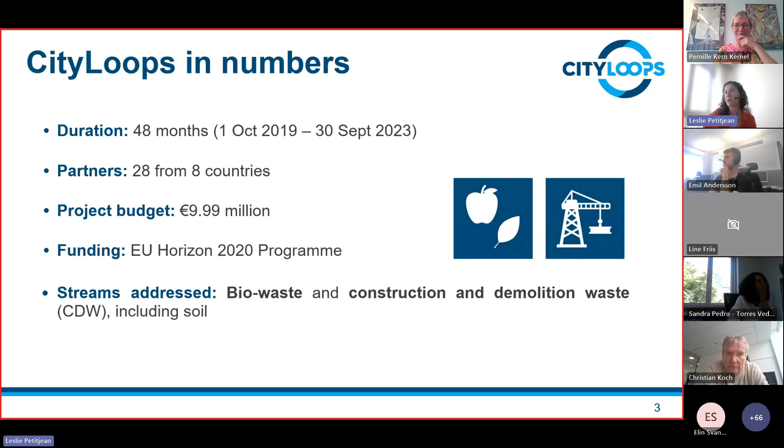About the consortium, there are around 28 partners in the project from 8 countries. Not only cities, but also supported by universities or ministries. That's what makes the big value of this project: the different range of partners working all together on this. This is a Horizon 2020 program.

So the main objective is actually to close, or at least narrow, the loop for those two streams of materials: bio-waste and construction and demolition waste. For this, we have implemented new instruments, new tools, new methodologies in 7 cities. Well, actually it was 7 cities for the whole project, but for construction and demolition waste, it was only 6 cities, which I will present in the slide after this one.

So the goal is to reduce resource consumption and consider how we can work more locally with the resources around the city, avoiding using resources coming from far away, and also reducing the environmental impact, or saving more CO2, for the urban development of the cities.

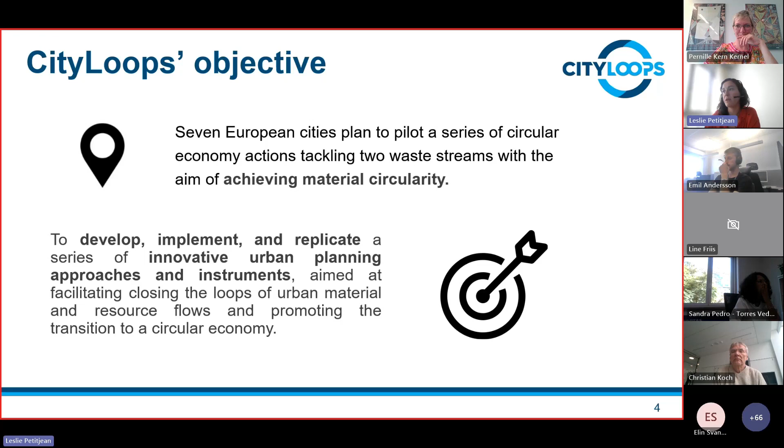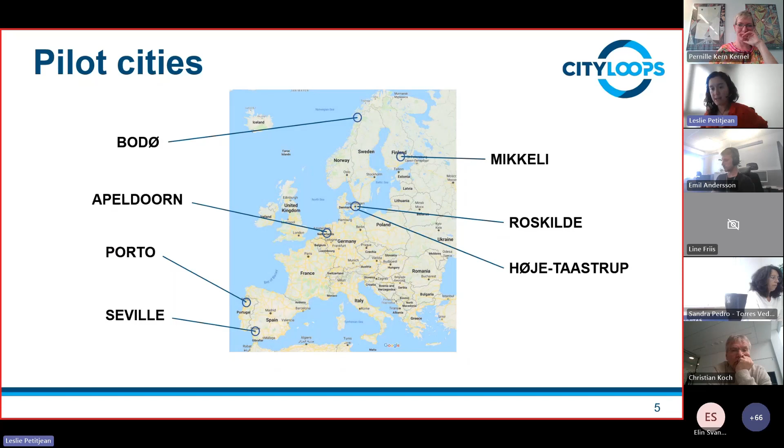So these are the 7 pilot cities which have been part of the CityLoops project. The good thing is it was quite a good representation of the European context, because you can see there are cities from Northern and Southern Europe: Bodø in Norway, Mikkeli in Finland, Roskilde and Høje-Taastrup in Denmark, Apeldoorn in the Netherlands, Seville in Spain, and Porto in Portugal. Porto was not actually experimenting on construction and demolition waste, but the 6 other cities were the partners for the construction and demolition waste.

So this is kind of the case for Mikkeli, for instance, and also Bodø, because I will explain it later, but it was a really huge project. And as you may know, sometimes the timeline of a project, especially for urban planning, gets delayed. That's what happened, but still they have developed many tools and interesting approaches.

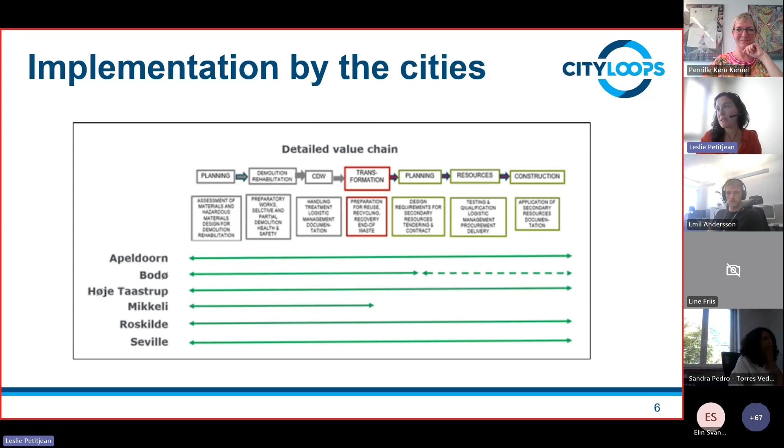So to start, we can start with Apeldoorn, a city in the Netherlands. What was also interesting, maybe I forgot in the last slide, is that these cities are working on different infrastructure, not only buildings. So you have some examples, obviously on buildings, but also on the renovation of roads or infrastructure for public works. This is the case for Seville, for instance.

For Apeldoorn, the project focused on the renovation of a residential road. The goal was to reuse as much material as possible locally. For this, Apeldoorn worked closely with Saxion University. They developed a series of tools and new approaches, for instance scanning the materials to assess the quantity and quality of the pavers that could possibly be reused locally.

What was also really important for the city was to involve the citizens in this project. So they developed raising awareness campaigns to let them know about what would be done within the city and the neighborhood.

When we talk about circular construction, usually we face the problem of storage and matching. Apeldoorn also faced this issue, so they developed a collaboration with an online marketplace. They struggled a bit at the beginning because they wanted to develop their own platform, but recognized it was hard to recruit new visitors. So one lesson learned is that if an instrument already exists at the regional or national level, just work with them because they already exist.

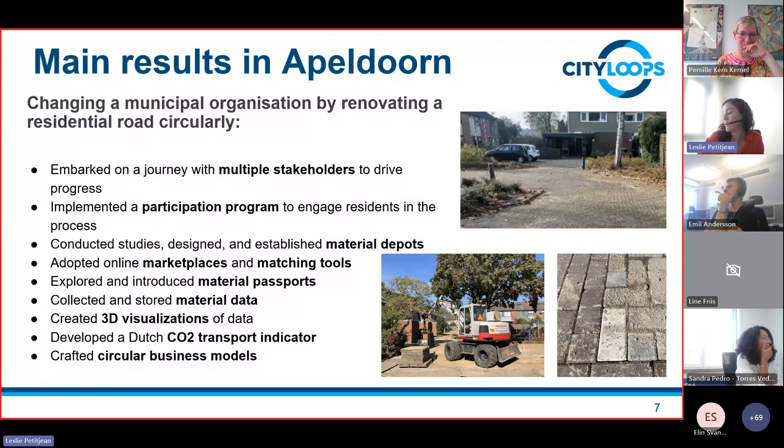So yeah, it was mainly for Apeldoorn, but just to let you know, for all the cities, if you want to know more — I don't have that much time so we cannot dig into each city — there are demonstration reports for each city on the website. So if you are interested in a specific case, just go to the website and find the demonstration report for each city.

For Mikkeli, Finland, they focused mostly on the demolition part. The demo action was about how to demolish more selectively and effectively, in this case a hospital. What they learned is that we definitely need a really good pre-demolition audit to be aware of which resources and materials will be demolished, and which ones can possibly be reused or recycled in another construction.

What was also important, and a kind of legacy for them, is that CityLoops really helped them involve different stakeholders, both within the local authority across different departments, but also externally. For companies, for instance, it was a really good opportunity to develop collaborative workshops, just to make them more aware of the need to develop new practices for circularity.

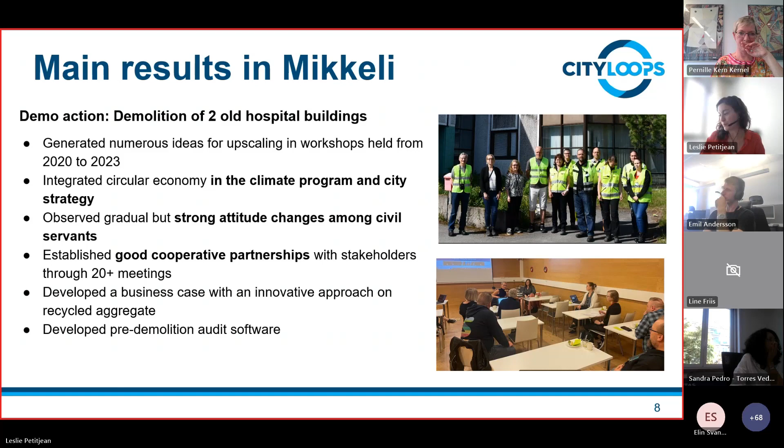For Høje-Taastrup — now we are traveling to Denmark, covering Høje-Taastrup and Roskilde — what is interesting is that they played the role of matchmaker. They went beyond their own assets and buildings, and worked with a social housing company in the city to use concrete that had been demolished from a social housing building to recycle it in the foundation of the new city hall. This is a good example of matching, and shows how the city can play this role of matchmaking between different stakeholders at the local scale.

They also worked on how to reuse soil locally. This is something that has been developed within CityLoops — how we can reuse soil locally — and it has been done by Høje-Taastrup, Roskilde, and Bodø as well.

One of the major lessons learned is what has been done with the old city hall of Høje-Taastrup. They worked with a private developer, Ikano, and embedded some circular criteria within the tender, because the goal was firstly to demolish the old city hall. But after a while, for different reasons, including the price of materials increasing this last year, policymakers and political representatives decided not to demolish the old city hall, but to refurbish it into new apartments in the future urban area.

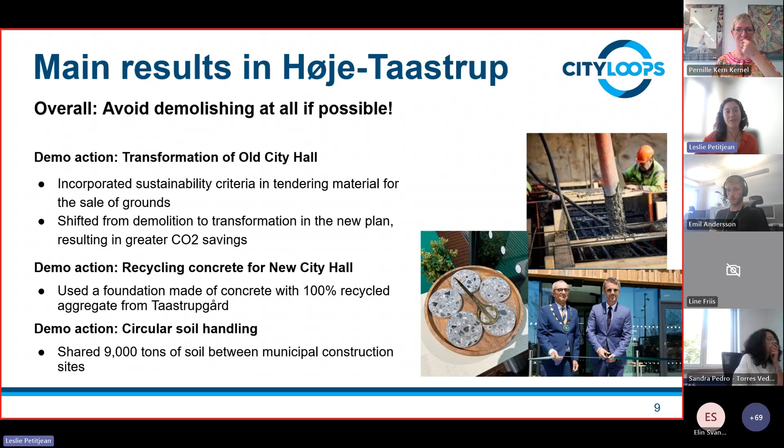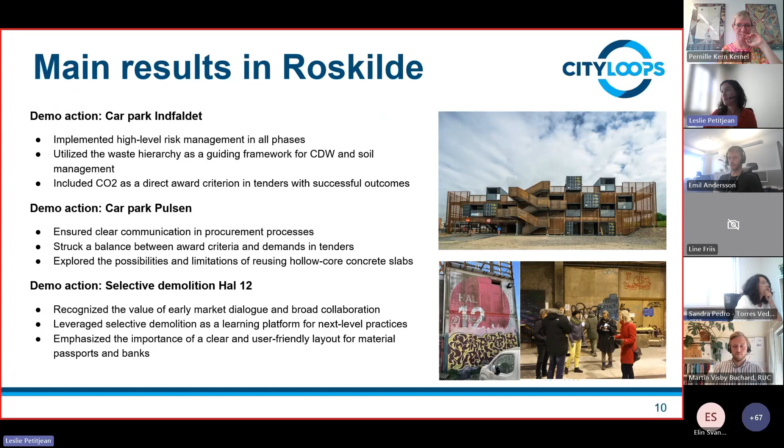From Roskilde, all the demo action focused on the urban area called Musicon, where there was a lot of demolition and transformation of buildings. It was a good opportunity to develop circular practices, especially on how to procure differently, how to integrate circular criteria to recruit the contractor, and how to deal with risk management, defining the risk between the contractor and the procurer, the local authorities, to change practice by managing the risk for this kind of new innovative practice most efficiently.

In Bodø, the main action was to demolish the military airport and relocate it to another area in the city. As I said in the introduction, this has not been done because the action was really too long. But they have developed a really nice digital twin tool, which was efficient to help policymakers take decisions.

This is a tool where you can find more information on the website.

An important thing as well is that they really put a lot of effort into involving different stakeholders - citizens, students, and companies - developing collaborative workshops. I insist on this because stakeholder engagement is crucial to get a lot of people on board with local authority. If you want to work on this, you really need to identify the stakeholders with whom you can work and who are willing to change their practice with you.

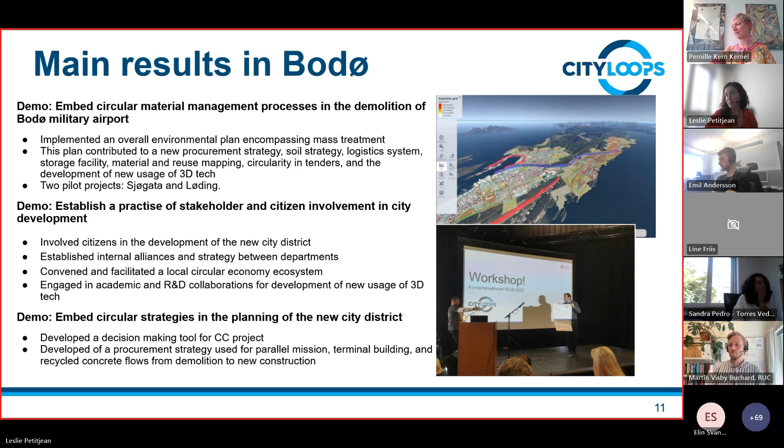To finish with the cities, the last one is Seville, where they worked on water pipelines because they wanted to replace them. The goal was not to use new material for this, but to try the best to reuse the material that they excavated.

One of the big problems in Seville is the illegal dumping of construction and demolition waste in the city. For this, they developed clean points to decrease the rate of illegal dumping, and we have seen that this really helped clean up the city, with people bringing their construction and demolition waste to these clean points.

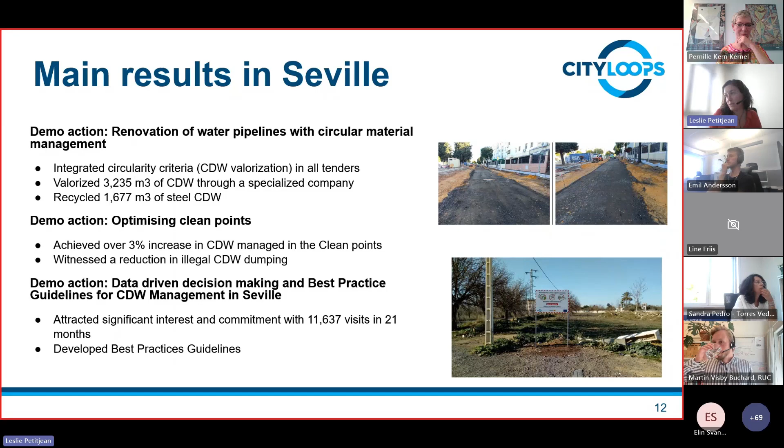So this was quite successful. Just to draw a bigger picture on the different lessons learned, here's a rough scheme. It's always hard to represent, since we don't know if it has to be round or linear, and you can address different parts of the value chain. You don't have to address everything, but we want to stress the main lesson learned for each step.

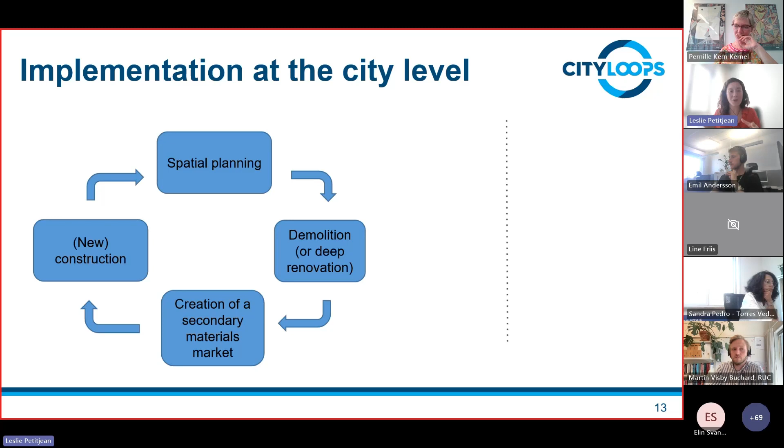So spatial planning, this is also one important lesson learned: the earlier the better. If you want to start working on this, do it well in advance and identify the stakeholders you'd like to work with, because you will never do it too early. This is still innovative, so you need a lot of time to prepare your project and coordinate with the different stakeholders. That's why we really want to insist that spatial planning, or planning in general, is always a really important step.

To illustrate this, we can talk about Bodø, which has done this with their digital twin tool, because data management and gathering all the data on the circular material flow could be really helpful to convince policymakers as well, if you want to launch a circular project.

For demolition, well, one of the main lessons I already mentioned is: if you can avoid demolishing, please avoid it and refurbish as much as possible. This is one of the main lessons learned from Høje-Taastrup. But also for demolition, if we really want this circular flow to be established, we really need to push the supply of reused and recycled materials.

So to do this, we actually have to conduct pre-demolition audits for each demolition or renovation, whatever it may be. This is a picture from Mikkeli, because they have really worked on this and developed guidelines about how to conduct a pre-demolition audit and a good screening demolition. This is really important, because if you don't do this step, you won't have the knowledge of which material you can reuse, within your own construction project, but also for other ones. This is a starting point, I would say, if you want to start this journey.

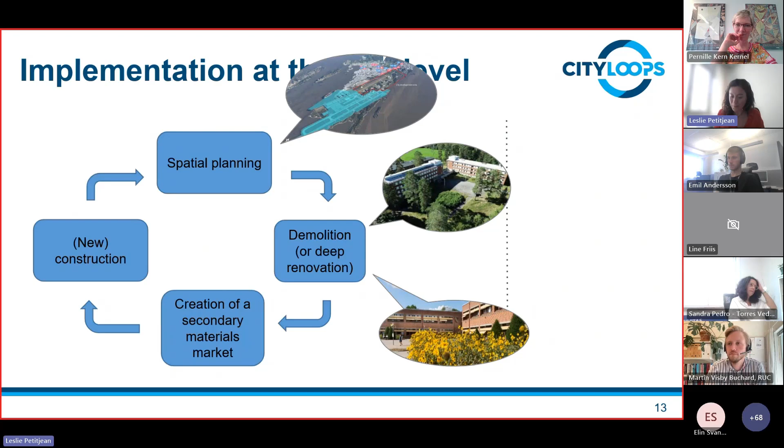Cities have developed material depots locally. They have also developed or used online platforms to help the matching. An example you can find on the Cityloops website is the experience from Apeldoorn, which used the DuSpot platform. But depending on your country, your city, and your local context, you can look for already existing instruments.

And the last point is new construction. We put 'new' in brackets because, again, if you can refurbish, refurbish. But in new construction, the goal is to push the demand for reused material, because if we conduct pre-demolition audits, we will have reused material that we can reuse.

But if there is no demand on this, there won't be a match between the two. So as a procurer, we need to have impact on the demolition, but also on the construction. We need to ask for reuse or recycling material within our new construction.

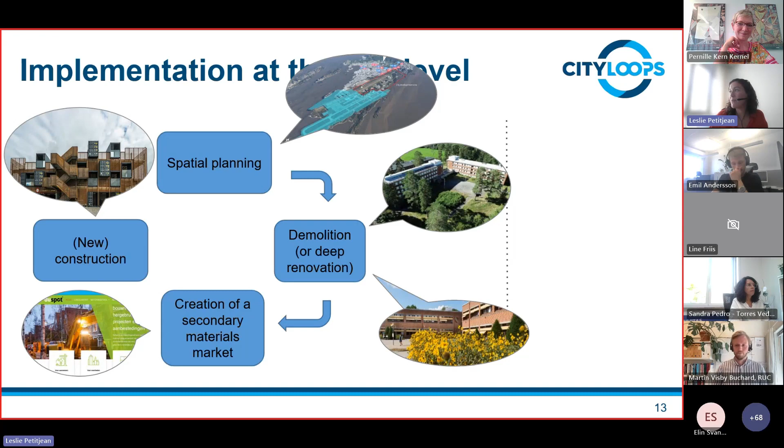This is actually what has been done in Roskilde, in the new parking garage built on the Musicon area. So this is basically the value chain, but here you have also some cross-cutting topics which are really important, like data management and traceability.

If you have developed some indicators about the environmental impact of your project, you can track the progress of your projects thanks to collecting data.

Stakeholder engagement and public procurement are also really important, because you need to identify as early as possible the good stakeholders and contractors you would be willing to work with. And also something we will discuss just after, the change in the organization, because we have seen that this is really a cross-cutting topic.

It will change your organization within the local authority. Some cities have developed internal working groups that worked pretty well, for the practitioner but also for the politician. But organization goes beyond the city, so it has to involve and embark stakeholders outside the city.

This is really a crucial issue, and all the cities say if you don't have political support, and if you don't have support from the different departments, you cannot really achieve this successfully. So you really need to get a lot of stakeholders on board.

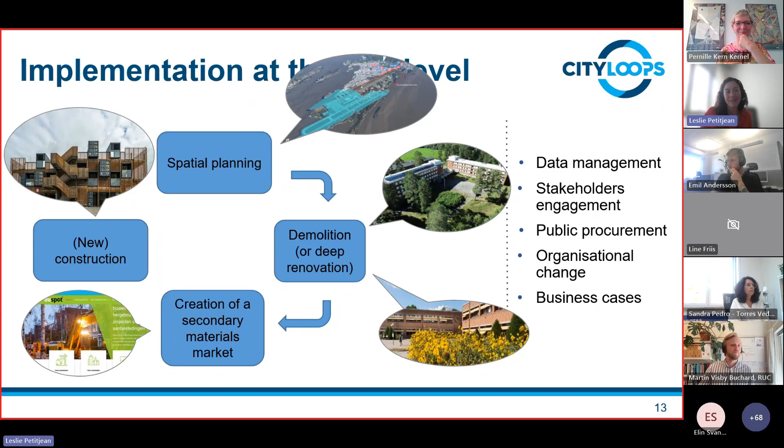The good thing is we have some profitable business cases that have happened in Cityloops. This is good news, because we know this is the major issue we face about circularity - that the market is not always ready. But for some streams and some countries, we're already there. So this is good news.

Just really shortly. We need to wrap it up, Leslie.

Yeah, so really shortly, the role of local authority - if you are a public procurer, we can work on our own assets. But if we want to increase the impact, you can also work as a local facilitator and network developer by developing tools to help matchmaking, and also developing new regulation on your urban planning documents, which can really help increase the impact.

And just two words on the Cityloops handbook - we have gathered all the different experience in this handbook that is available on the website. What we want to give here is a comprehensive overview and the first level of information for cities who want to start working on circular construction.

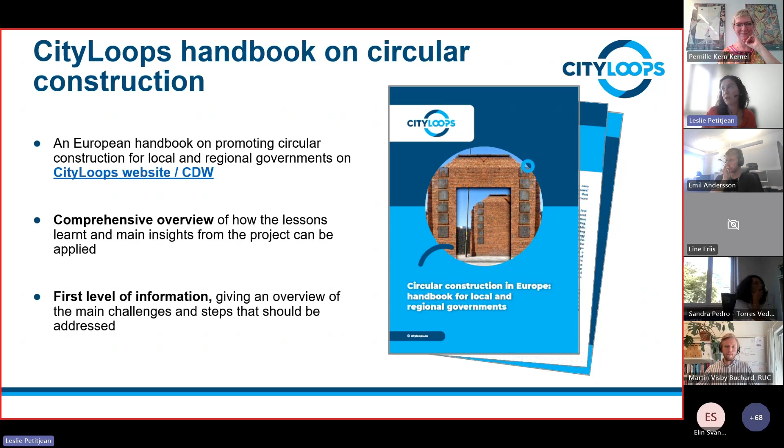We really wanted to have a practical handbook with practical recommendations. Throughout the document, you can find good examples from cities and some quotes as well, to have really concrete feedback from the cities.

We also have some relevant tools, because we know that if you have the will to start, you really need to work with some tools. Depending on the different steps of the value chain, you will find different toolboxes that will help you identify tools that could be useful for your project.

And again, this is just the first level of information, so feel free to visit the Cityloops website, where you will find more information - the demo reports of the cities, and the instruments that have been developed.